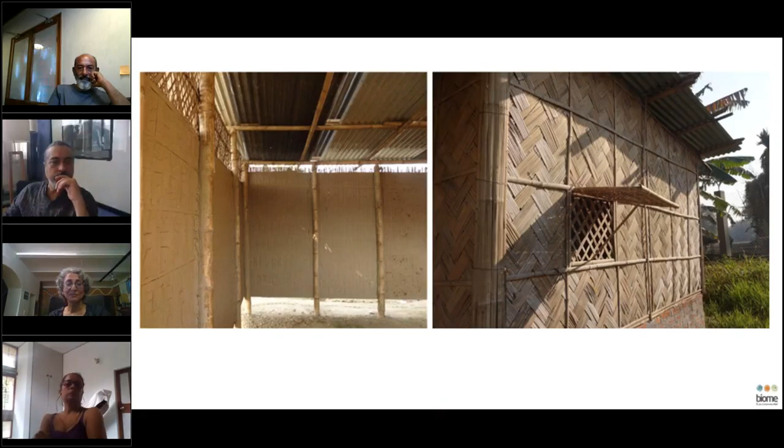And then I call this the mother of all wattle and daub construction and design: Gandhi's ashram at Wardha. Same in terms of walls, two materials. But what he does inside is beautiful - a lime wash, so you get a very nice white clean surface. But still, if you notice, the windows are the same materials which are part of the top, and the verandas are two-layered. One layer is semi-open; that layer, though semi-open, is still like a living room which you could enjoy.

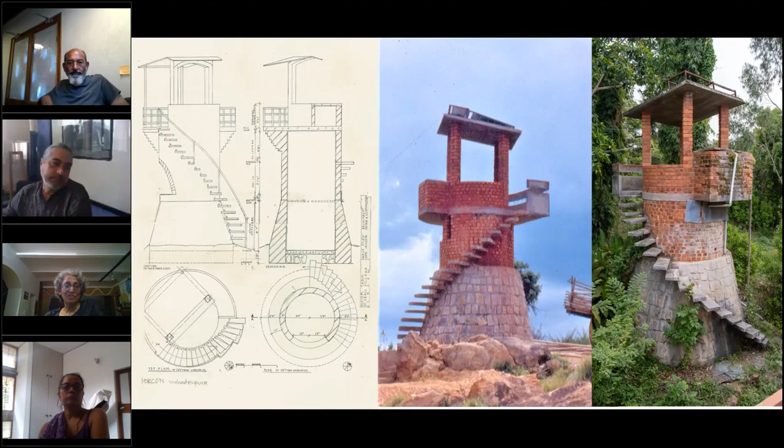Then I bring in our project. One of the projects which was done about, this is done in 1996, so 24 years back, meant in a place where we had to collect the water from the river, use it for agriculture. At the lower level is a stone tank and upper level simple bricks, stone cantilevered steps. And we were able to document it, go see it about a month back, and it's still the same.

Above, we, even at that time in 96, put a photovoltaic cell. Next is I go to a recent structure of a recent design, which is also simple pleasures, only when you have challenges. So here is a project where it's within the city of Bangalore, in the suburbs of Bangalore, where you get a plot which is with apartments under construction one side and industrial go down, a small road in the front.

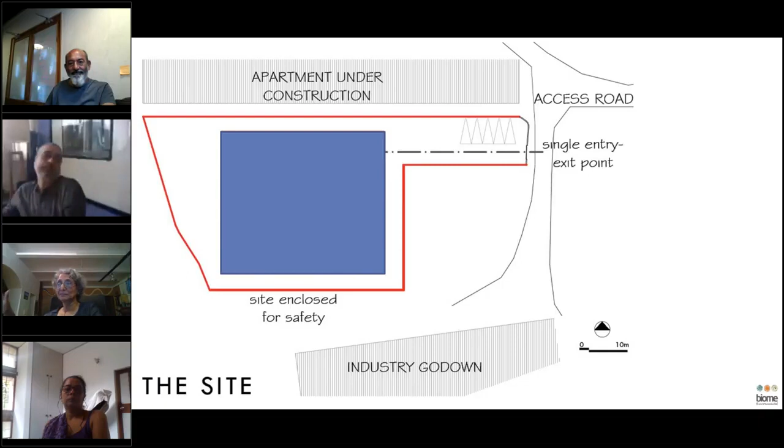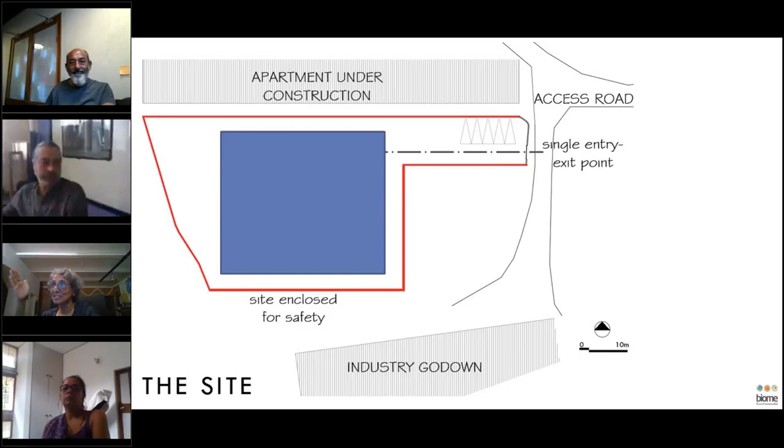And there's this plot which the Vastu guy has come and told us that this is the amount, the blue rectangle, which alone can be built as per Vastu. So now these constraints are placed, and the client also puts a constraint of budget and 5 months for design and building. So this became almost like a design and build exercise, and we talked to the clients and started the whole project immediately.

So I'm just showing this picture. We thought of a tree, and not a tree for this whole romantic image of studying under a tree, but tree for its structural reason, for the dendriforms, and because of the possibilities a dendriform could bring about. And the resultant use by the teachers to hang things and children to be able to climb up is something which we enjoyed getting in.

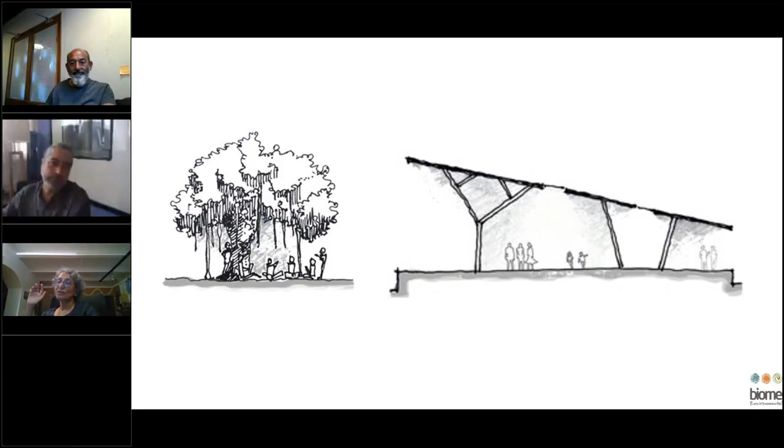But we also talked to the client, and the client was all the time saying that this plot of land is available to him only for 5 years, because it's on lease, and they would move out, and this building either would be given away to the owners or demolished. And we didn't want either of it to happen.

Even given to the owners, they might just end up using it as another go down. And we said, you have spent so much money, so can we look at it differently, that the whole building can be removed? While we are talking this concept to him that the whole building can be dismantleable, we are also designing, and the tree form is continuing.

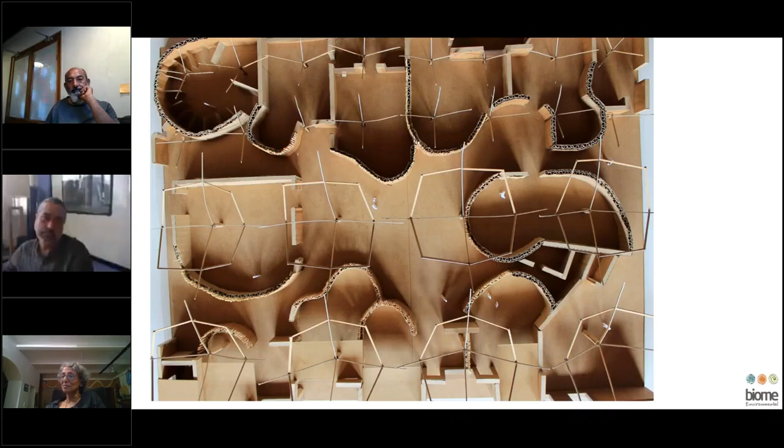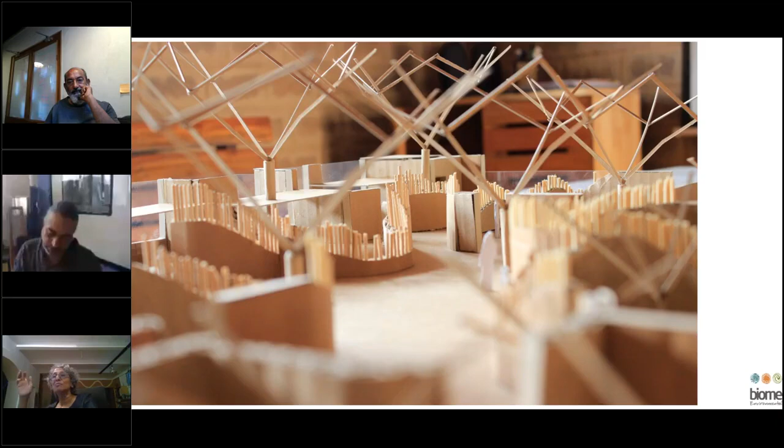The tree as the support, the model is made, and you have a lot of trees. We continue working at the model and creating the walls with both earth blocks and paper tubes in the design. And we talked to our structural engineer who, from our 16 trees within the building, pares it down to just about 8. And this is the structure of the column support.

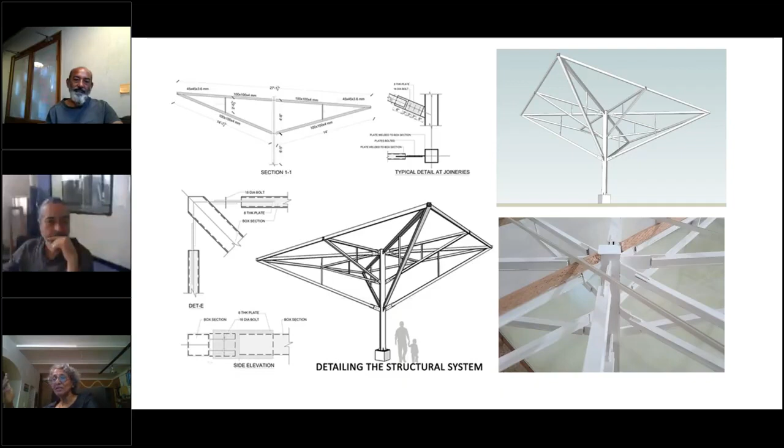We had a contractor who didn't quite understand the column itself, even after all the drawings were done. So we made models of the joint. And while we were working at the level of the columns and structures, we also decided, can we see how much of the building can be dismantleable?

So even at the foundation level, we are lucky to be in Bangalore, where we get granite slabs. So these granite slabs are used so that the plinth, the filling for the plinth doesn't come out, and except for the base where the concrete foundation is, besides that, everything else from this building can be taken and reused.

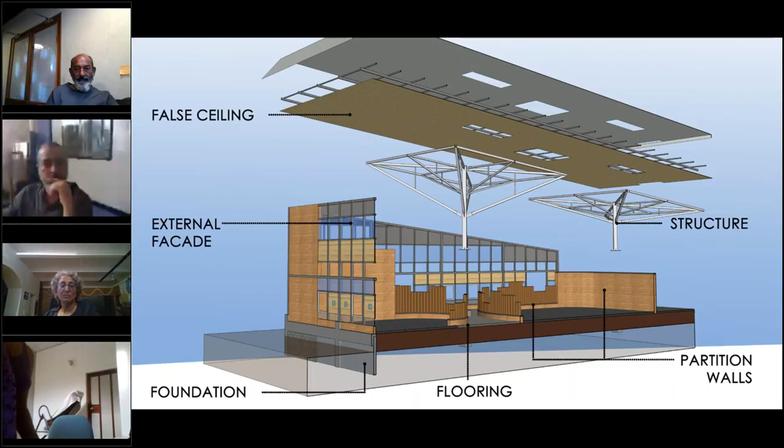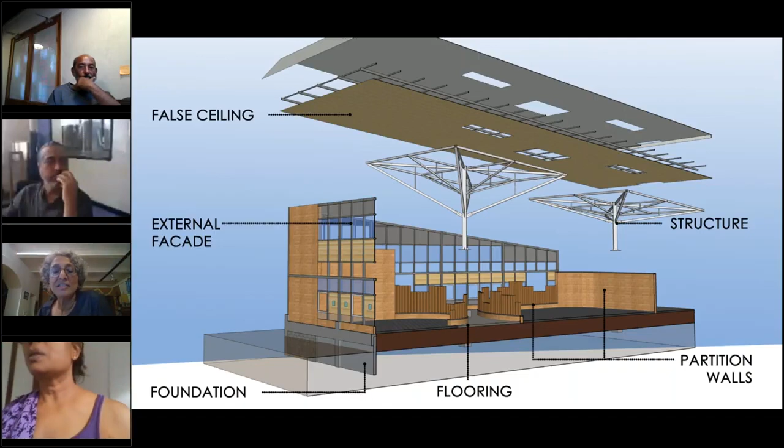Everything can go back to nature. You can reuse it if need be. It's the 5th year. We don't know what the client is planning to do, but we have used a bit of earth blocks, and I want to tell the story of the earth block also.